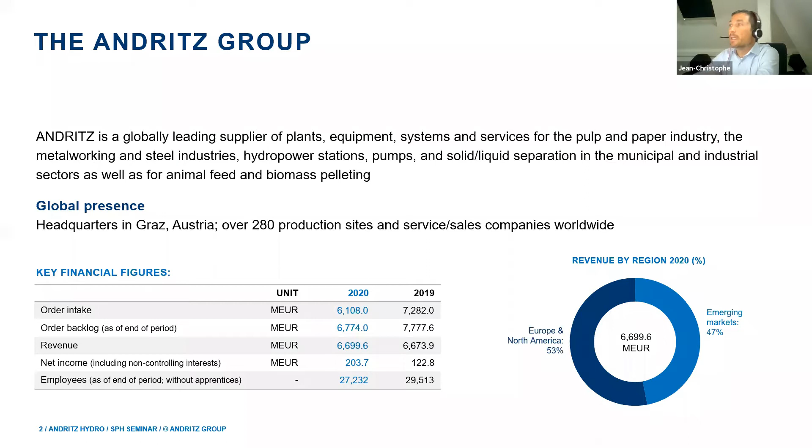Our activity weighs basically 6 billion euros per year, approximately. We have a global presence all around the world. And we are organized with 4 main divisions.

The biggest and historical one in the group is the pulp and paper division, providing equipment for the transformation of wood to paper, so the pulp and then the paper. We provide turnkey paper mills all around the world. Another division is the metals division, whose activity is mainly composed of equipment for metal forming and especially for automotive industries. I belong to the hydro division, so we provide electromechanical equipment for hydropower generation, which is composed of turbines and hydro generators, among other products.

And the last division is separation. We provide equipment for solid liquid separation, dewatering, applications in wastewater treatments for municipalities, but also for various industries, including mining.

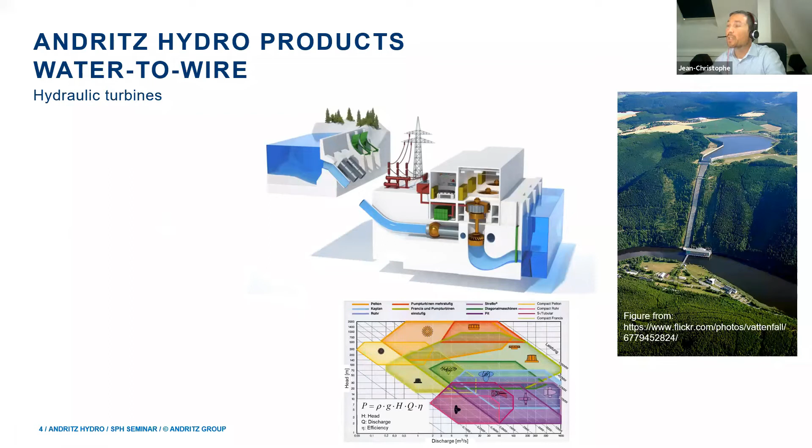And depending on this ratio between head and flow rate, we have all those various types of turbines, and we will focus more on this type of machine, the Pelton turbines, which are designed, or let's say specialized, for high head above a few hundred meters and relatively low water flows. It's an old lady which was invented in the 19th century in California during the gold rush.

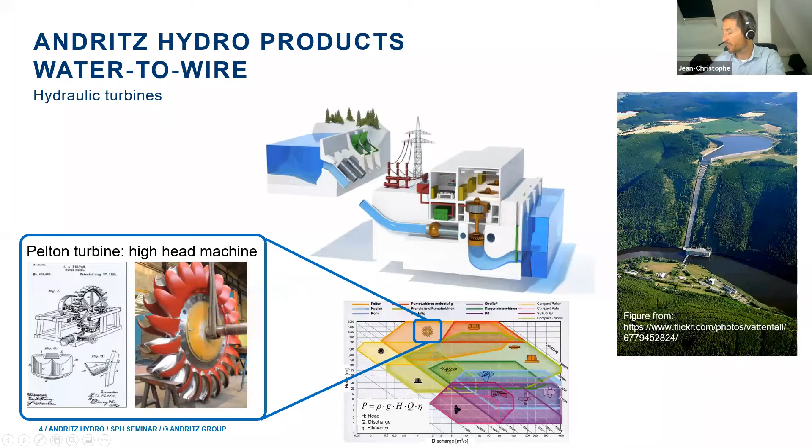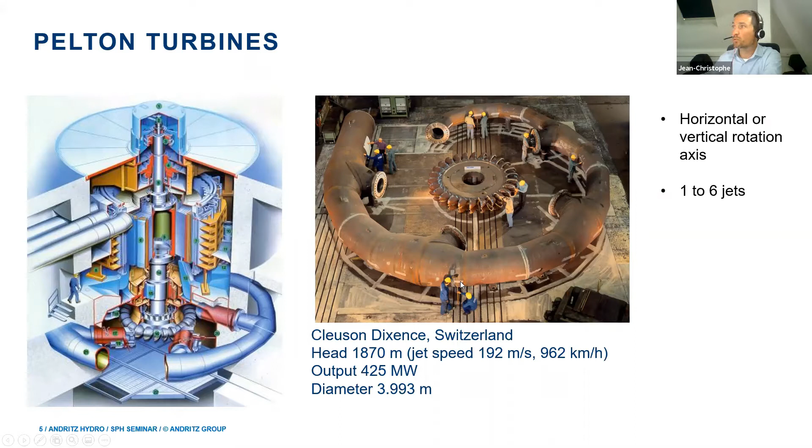When we look at the challenges for investigating the flow in these machines, we have to deal with quite complex physics. We have a combination of internal and free surface flows—internal in the Pelton distributor and all those pipings upstream. Then, of course, we have the jets and the runner; these are free surface flows. We have a rather complex geometry with rotating and static components. It's highly dynamic and unsteady.

We also have very different time and length scales. Let's assume the pipes have diameters of a few meters. The runner you have seen is also a few meters in diameter, but the buckets themselves are much smaller. Then in the jets we have surface perturbations with droplets, so it goes down to centimeters and millimeters.

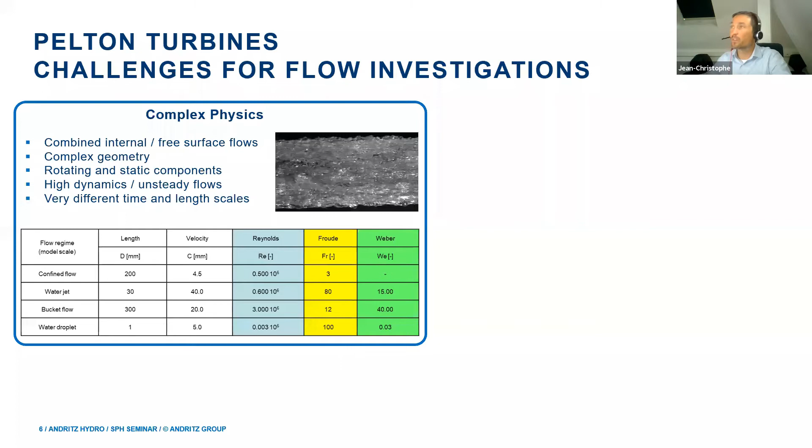So it's hard to respect all the homologies, especially when we look at model testing in laboratories. We are equipped with our own hydraulic laboratory where we test small scale machines. This is the historical way to develop hydraulic turbines, and it brought a lot of improvements in the past century, but it's also quite limited. It's of course very close to reality, but we have to sacrifice some of the homologies. It's quite expensive and slow in terms of development cycle time, and it only provides global information because the free surface hides basically what happens on the rotating buckets.

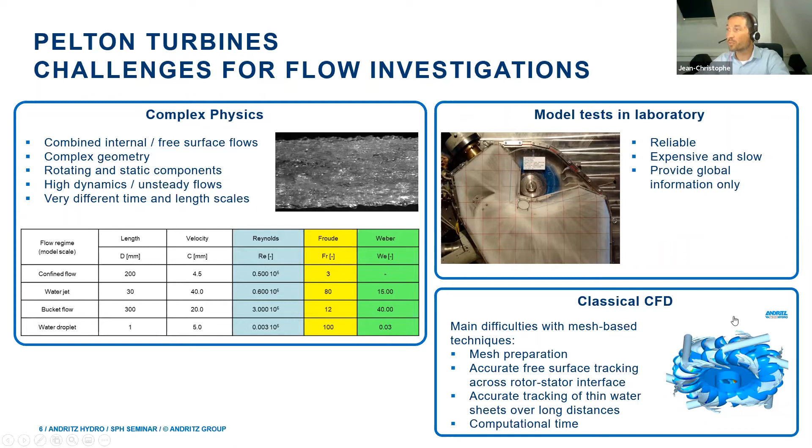In the 90s, the industry started to use classical CFD approaches using computational meshes to investigate what happens. This requires a tool able to represent a free surface with a mesh-based technique. The free surface, generated in a non-rotating simulation domain, has to cross a rotor-stator mesh interface once at the entrance of the runner, and a second time when the water exits and travels into the Pelton casing, the turbine casing. This is quite difficult—the mesh preparation is very tricky, the solver time is expensive, and a lot of expertise is required to set up such simulations.

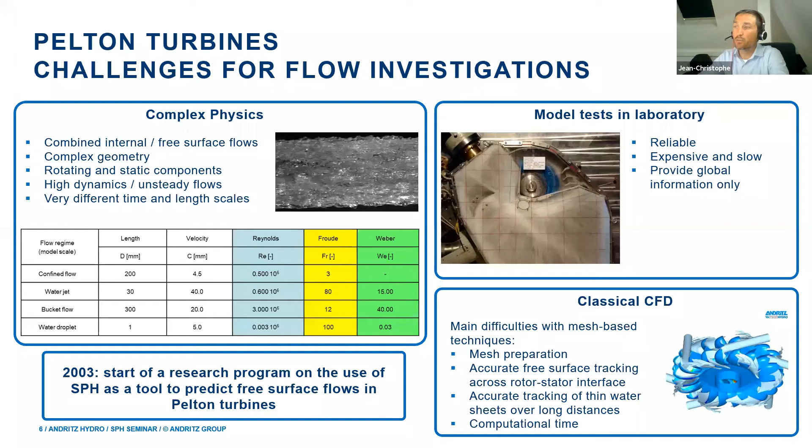That's why at the beginning of 2003, the company started a research program aiming at making use of SPH-like tools to predict the free surface flows in Pelton turbines. So that's a bit of the background and introduction to today's talk.

Now looking more precisely at the next steps, I will present what we have finally adopted as a numerical method to reach our target, the SPH Arbitrary Lagrange Eulerian approach. I will give some details of what we manipulate, present a few corrections we have added to this method that we use to reach good accuracy and precision in our simulations, some extensions that also pave the road for other applications, and finally some industrial applications for our hydraulic turbines, not only Pelton turbines. In my conclusions, I will also mention my opinion about the most demanding aspects of the method and where future investigations should focus.

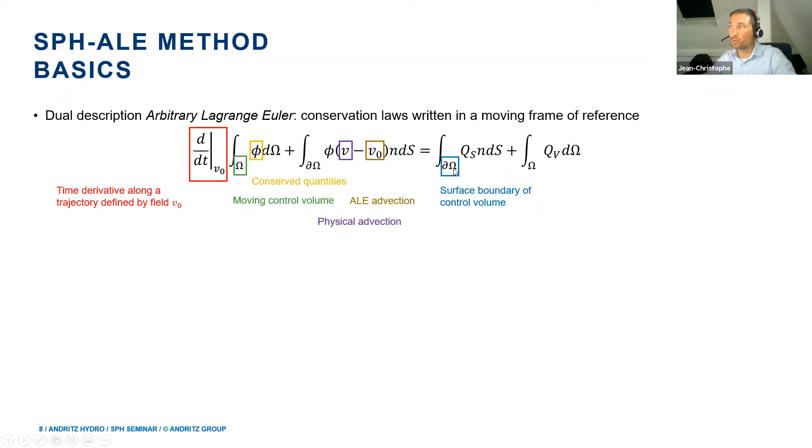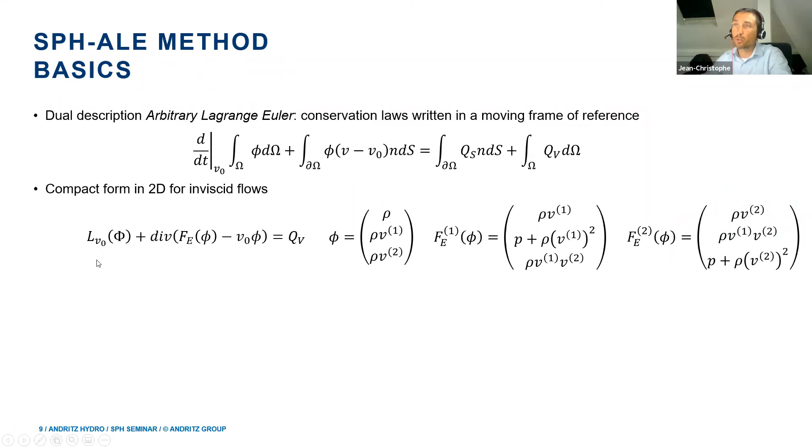Then we have the source terms, surface and volume terms, and this notation here will be related to the surface of the control volume, the surface boundary of the control volume. This being said, we can have a more compact form, introducing a transport operator here, LV0, which is defined by the transport velocity field V0.

Then by rearranging those integrals, we have the divergence of the physical flux and an ALE flux. Okay, and if we apply that to 2D inviscid flows, the vector of conserved quantities is densities and the two momentum components. We have a physical flux function, which has two components also here, and that depends on velocity and density and pressure. It's not written, but I will consider that we compute the pressure with an equation of state like the Tait equation, so a barotropic equation of state.

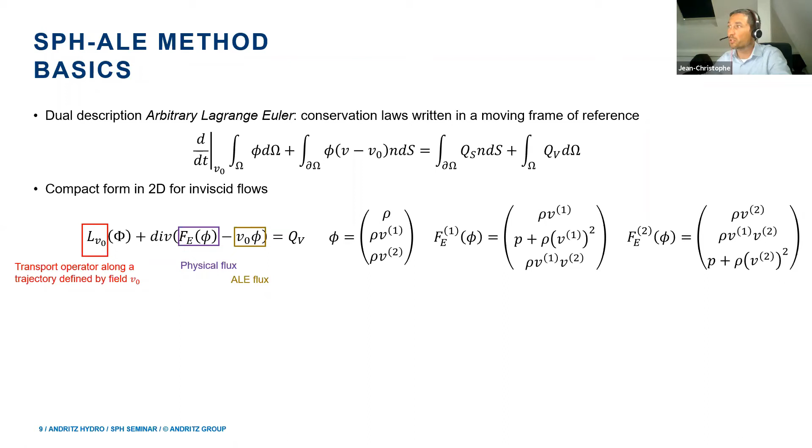Now we jump to the discrete version. So thanks to Vila, we have an SPH-based discretization of this compact form that has this form. It's the time derivative of the conserved quantities where the volume of the particle appears and the numerical fluxes, which are summed over the neighborhood.

So in terms of notations, I will usually designate the particle of interest I, while J is related to the neighboring particles. And the neighboring particles are contained in a certain domain, noted di, which is the support of the kernel function centered on particle I.

Here we have a numerical flux, which is adapted to a moving Riemann problem between the two particles I and J. And that one is used to assemble the ordinary differential equation.

So a few comments about this numerical flux. Let's take a very simplified neighborhood around particle I. Let's consider one of its neighbors with index J, and imagine that we have a sort of interface located between particle I and J, at the middle point between the two particle centers. So position denoted xij, and the direction linking the two particle centers is noted nij.

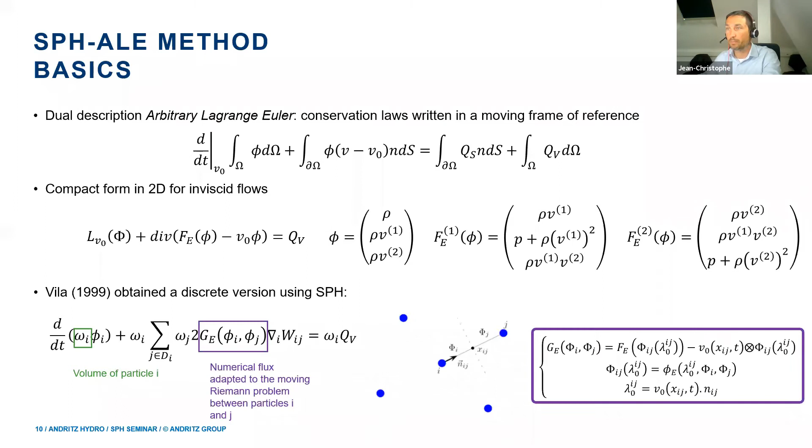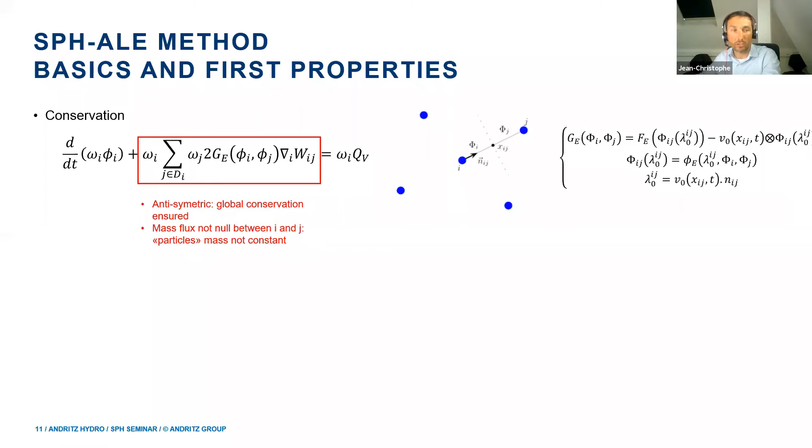So some first properties: we have global conservation because this flux summation involves terms which are antisymmetric. What is given from I to J is indeed received by J, let's say it simply like that. But what it also shows is that there is a flux of mass between particles I and J. There is no reason to assume that this flux will be zero, which means that the mass of each particle will change during the simulation, which is a difference compared to the classical SPH approach.

Of course, we need to add two equations to close the system, I would say. First is the motion of the particle centers, so obviously in our case we move them according to the introduced transport velocity field. And we have an additional equation compared to classical SPH, which is an explicit time evolution equation for the volumes of each particle.

It depends on the divergence of the transport velocity field, so the natural formulation is like that. It's equivalent to this one, where we introduce the interface velocity. We have seen that the physical fluxes involve this interface velocity, and it's quite convenient for the rest of the method to have directly this interface velocity in the volume equation.

This term involves symmetric contributions, which means the global volume is not conserved. That's a well-known feature in SPH. Here in SPH-ALE, it becomes visible, I would say, in this equation for the volumes of each particle.

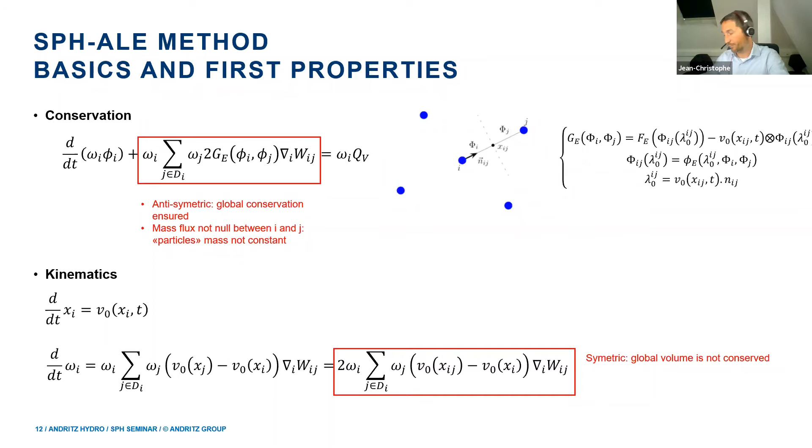Now, if we look at how we introduce boundary conditions in SPH-ALE, we do that by using what I would call a modified gradient or divergence operator for the particles whose kernel support intersects the boundaries. In fact, it's just going back to the way we usually move the gradient operator from the function to the kernel function by integrating by parts.

Usually this term, the boundary contribution, is neglected because most particles are far enough from the boundary. Since we usually have a compactly supported kernel function, this term is 0 for most particles in the domain. But for particles close enough to the wall, at a distance less than the size of their kernel support, there is a contribution that should not be neglected.

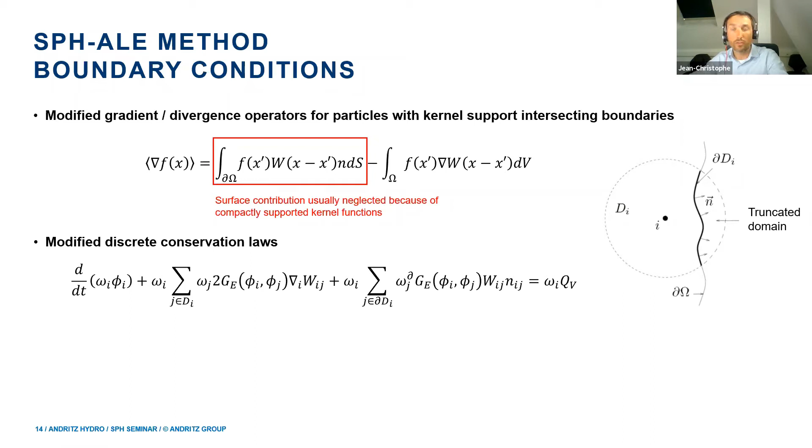The approach we have followed is to discretize that surface contribution in the gradient and divergence operators directly, by discretizing the boundary surface with calculation points and applying a similar quadrature formula to take into account the fluxes coming from the boundaries. When we do that, we end up with a modified discrete conservation law.

We again have the volume contributions that we had previously, where the summation is done over the neighbors which are volumic particles, and a second sum over the neighboring points which directly discretize the surface. These have a spatial extent, one dimension lower than the problem dimension. So in 3D they are surfaces, and in 2D they are segments.

We again have a numerical flux function adapted to a moving partial Riemann problem, because now instead of having two states, we have one state, which is the particle of interest, and the other state is in fact a boundary state. At the boundary, we impose some part at least of the solution. We will see that later.

Also in this summation, we no more have the kernel gradient. We have the kernel function and the normal vector at particle J, at surface element J.

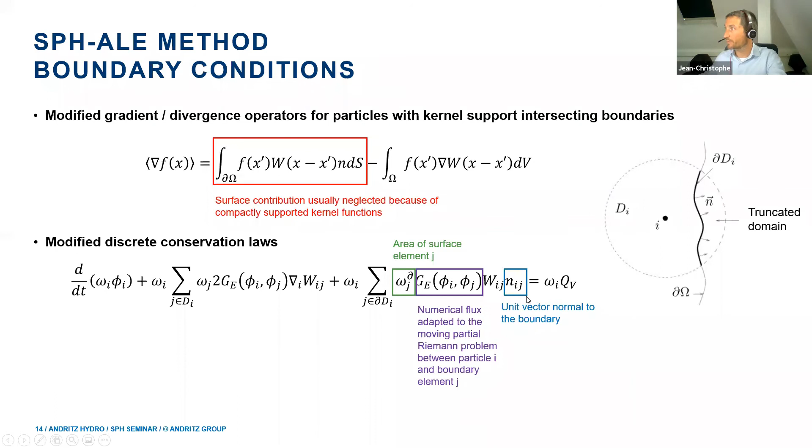Now in practice, how do we compute the intermediate state that is at the heart of the numerical fluxes? Well, we use Riemann solvers. The purpose of those solvers is to compute the solution of a discontinuous initial condition for hyperbolic problems.

If we restrict ourselves to the case of the Tait equation of state, we have only 4 states separated by 3 characteristic waves. So here we have a diagram with x, in a one-dimensional approach, x being the space dimension and t being the time. Initially at t equals 0, at x equals 0, we have a discontinuity. On the left, we have a certain state characterized by its own density and velocity. On the right, the same, its own density and velocities.

But then, right after t equals 0, we start to develop at the interface new states characterized by a constant density, which means a constant pressure also in our case, and a constant velocity in the direction of x. If we are in 2 dimensions, the second velocity component is discontinuous on both sides of this third characteristic wave that is in between the two others.

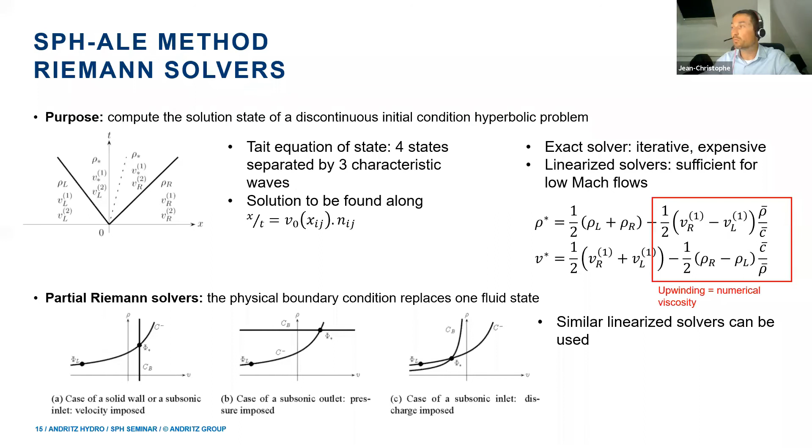A bit of improvement in the frame of low Mach number flows. Those Riemann solvers presented just before tend to introduce an excessive numerical viscosity. It's not only the case for low Mach number flows, also for medium Mach number flows it's observed. It's necessary to improve a little by adapting the left and right states that we inject to the Riemann solver.

To do that, a well-known technique, also derived from finite volumes, is called MUSCL, where the piecewise constant approximation, where we say the left and right state correspond to the states at the particle centers I and j, are replaced by linear extrapolations using a certain estimate for the field gradient on particle centers I and j.

So in practice, if we simply apply this extrapolation, we end up with left and right states composed of the states at particle centers I and j, and a certain extrapolation that depends on the gradient of the field estimated at particle I or particle j, and the vector joining particles I and j. If we just do that, the system tends to be unstable.

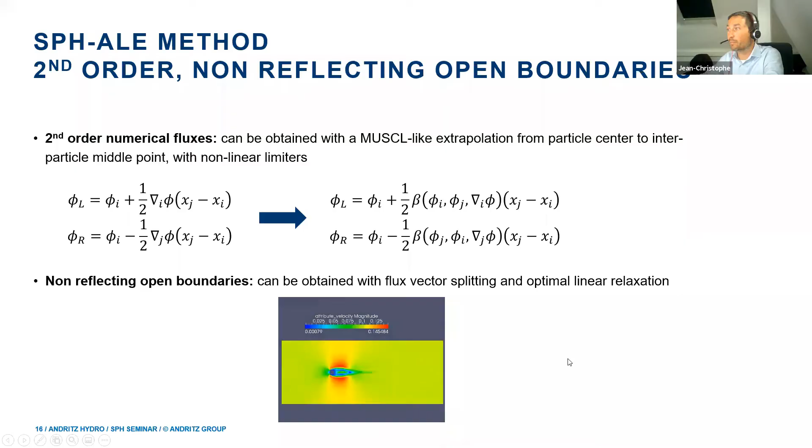Okay, now that we have the basics of SPH-ALE, we will have a look at some correction techniques that we have introduced. The first is balancing of the particle volumes.

As I said, we have an explicit time evolution equation for the particle volumes that is based on the divergence of the transport velocity field. Let's assume that we choose this transport velocity field as being the physical velocity field, the Lagrangian field.

We can have strong changes, I would say, from one particle volume to the next one, because the regularity of the transport field plus the inaccuracies of the SPH divergence operator can lead to that. But we also know that SPH is not very good at handling particles which have different sizes.

So our target here is to try to maintain a rather homogeneous map or field of particle volumes. And to achieve that, a certain diffusion term in the equation of the volumes is desirable.

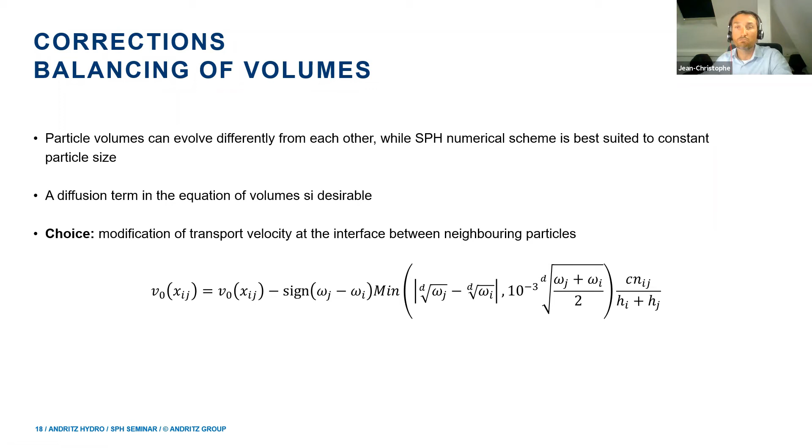Another correction is about, again, a modification of the Riemann solvers. As I said, even if we have a MUSCL scheme, if we really have low Mach number flows, we suffer from too high numerical diffusion, numerical viscosity. It's well known also in the finite volumes community, and a well-known solution on their side is to use preconditioning.

So us, we have a sort of transient solver, and we don't want to compute a converged steady state. We have to compute a succession of transient states, so the preconditioning can only be applied to the upwinded part of the Riemann solution. In practice, it consists in multiplying the Riemann problem with a preconditioning matrix which scales with the square of the Mach number.

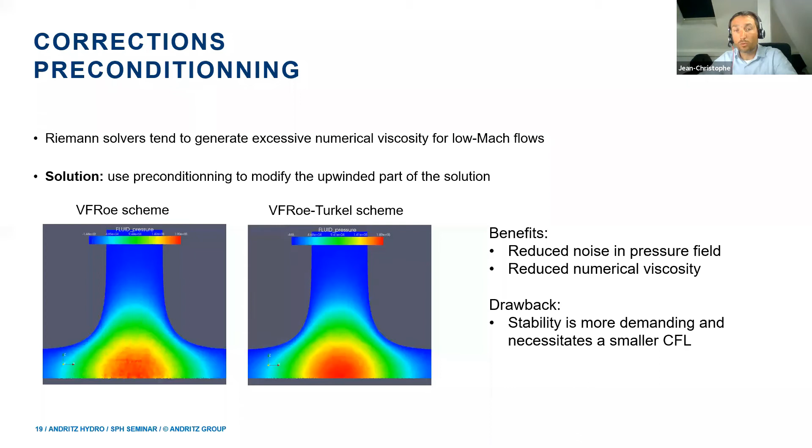So we increase a lot the number of iterations of the solver to reach a certain physical time, and this is a bit tricky. So in practice for industrial applications, it's not always possible to pay that additional price. A more important issue is about how we do the flux summation in SPH, because SPH-ALE relies on a flux summation that is governed by SPH divergence operator. And we focus on what we in ANDRITZ call the closed box error and closed box correction.

To introduce the topic, I make a parallel between finite volumes, integration stencils, and what we have in SPH. On the left, I have a sort of unstructured finite volume mesh that would be the closest variant of finite volumes to our SPH, I would say. And we know that by construction, the finite volume mesh fulfills this condition. At the continuous level, we expect that the integration of this term, which is the unit vector pointing outward the finite volume cell along the cell boundaries, is equal to 0. And by construction, the finite volume mesh guarantees that very easily, because if we are in 2D with triangles, the triangles are real triangles.

Now, if we look at what we have in 2D in SPH, at the continuous level, the equivalent of this condition is supposedly fulfilled. But the discrete counterpart, which involves maybe only volumic contributions or a combination of volumic and surfacic contributions, if our particle of interest is close enough to the boundaries, is not equal to 0 exactly. That's what we call the not closed box, and this is a problem.

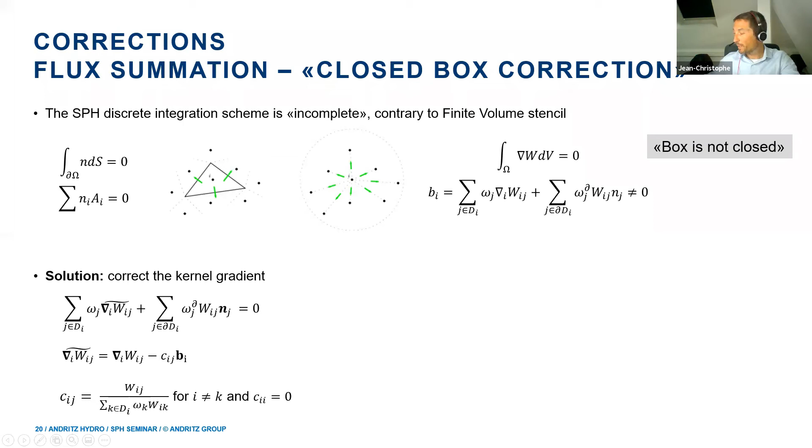As I said, the error is local and the correction is local also, which means that we break the symmetry of interactions between particles I and J, which means that we break the global conservation. It's often a debate in the community whether we should favor conservation or consistency. I tend to favor a little bit consistency in this situation, because the benefit that we get in practical applications surpasses the drawback of breaking the global conservation.

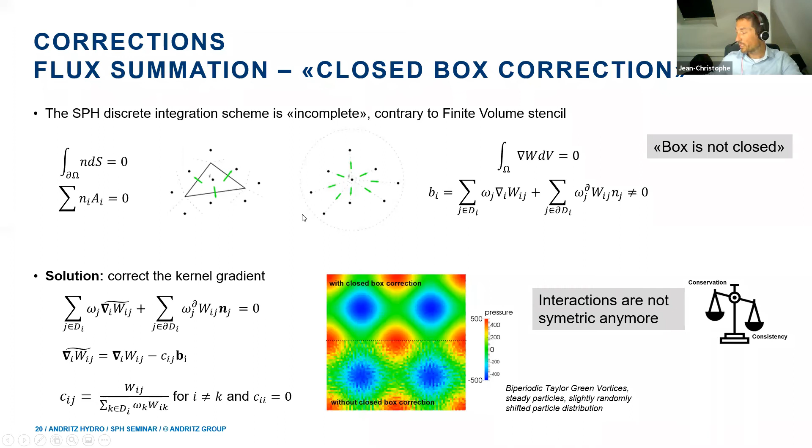This correction technique that we apply on the kernel gradient, so that we improve the flux summation scheme, is related to the next one, which is particle shifting. The previously introduced kernel correction cannot be used if the error monitored on a given particle becomes too large. I can't give a precise meaning of what too large means, but if we do nothing on the particle positions, we can't apply it for a very long time. So we have to maintain this error within a certain bound.

For that, we apply a particle shifting, which is highly inspired from the packing algorithm introduced in the community by our Italian colleagues. We apply that particle shifting at each iteration by modifying the transport velocity of each particle. This is again very valid in our ALE approach to do that.

How long do I have still? Hi Jean-Christophe, you have between 5 to 10 minutes more. Okay, I will hurry up a little bit.

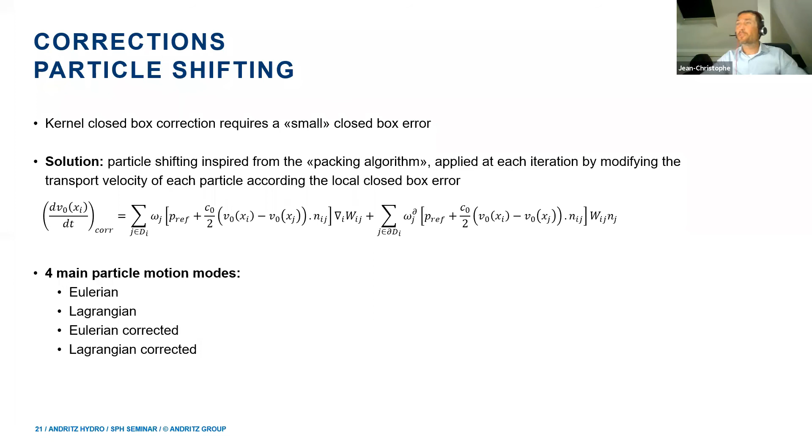So this is the form of the correction. We have a certain number of particle motion modes. I will focus on one, which is what we call the Eulerian corrected. Here you can see that the correction involves also a possible motion of the boundary elements.

Here is what we can see: we have moving NACA blades in 2 dimensions. Particles around those rearrange themselves according to this motion. The others remain steady, and we have no glitch at the interface between moving and steady particles, just a smooth transition.

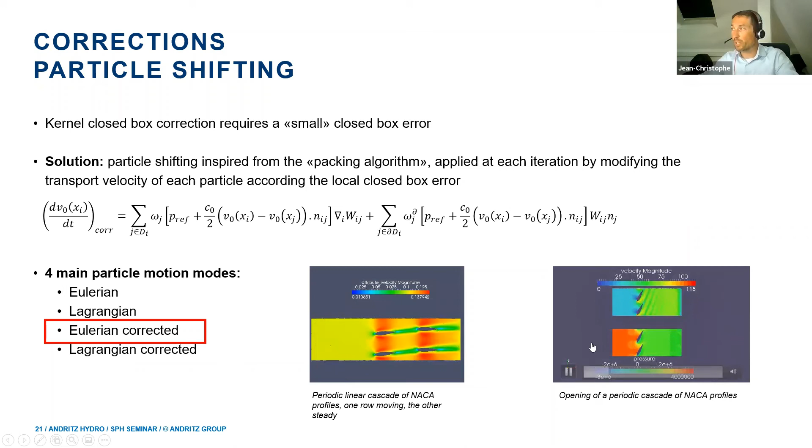And here the same with blades which have an open motion, so we establish a flow. It's the same: particles around the blades move, the others remain steady, and there is no average motion from inlet to outlet.

Some extensions: it's possible to have multiphase with SPH-ALE. For that, we block the convective fluxes between interacting particles. We also introduce acoustic Riemann solvers, which are able to derive a solution of the Riemann problem even with a strong ratio of acoustic impedance, meaning strong ratios of density mainly.

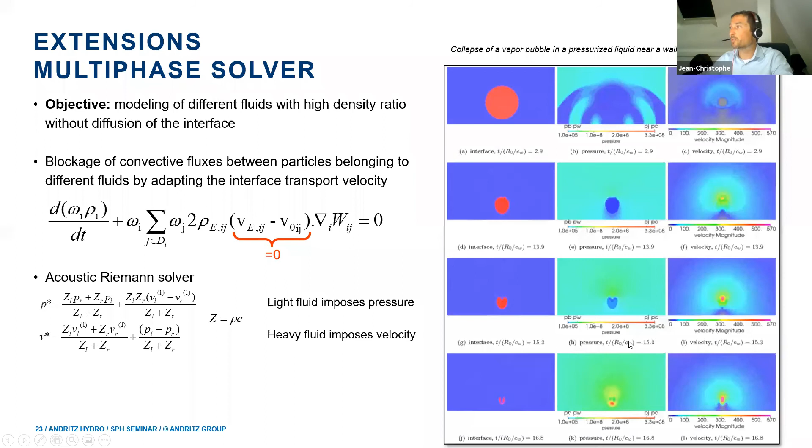As an example, here is the collapse of a vapor bubble immersed in a heavy liquid, which is pressurized and close to a wall. This is the result we have: a microjet forming inside the bubble during the collapse, and we can compute velocities and, more importantly, the pressure.

Another extension is the coupling of SPH with finite volumes. The strategy relies on overlapping SPH and finite volume domains, with the target of using each method where it's best suited, especially to have the neighborhood or skin around a certain body managed by finite volumes, so that we can have refinement in the normal direction to the wall.

We use chimera finite volume cells to transfer information from the SPH domain to the finite volume domain. The overlapped SPH particles can use finite volume cells as neighbors, or they can have their properties interpolated from the finite volume cells.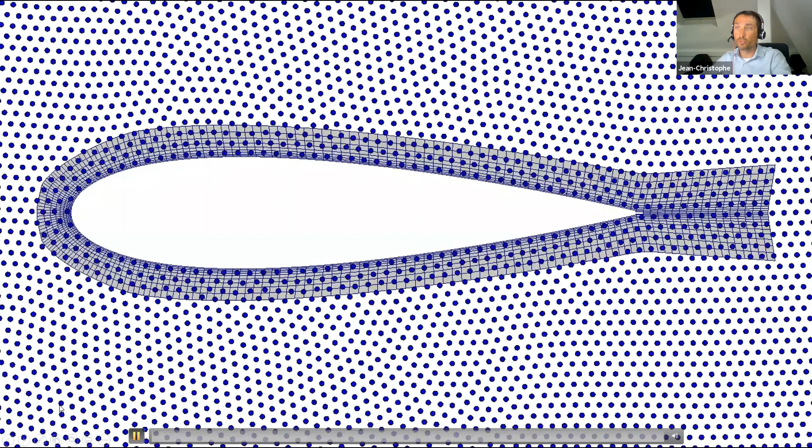It can also run with moving bodies. Here we have a rigid body motion for the finite volume domain, and the particles rearrange themselves as previously, using this Eulerian corrected motion mode. Here is an illustration of what it gives in terms of pressure predictions, with a clear motion of the stagnation point and the appearance of the detachment.

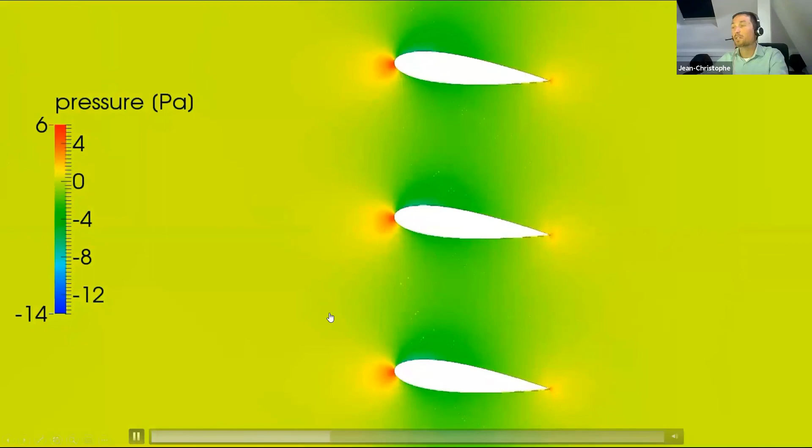Again, this coupling is not fully conservative, but consistency is for us more important.

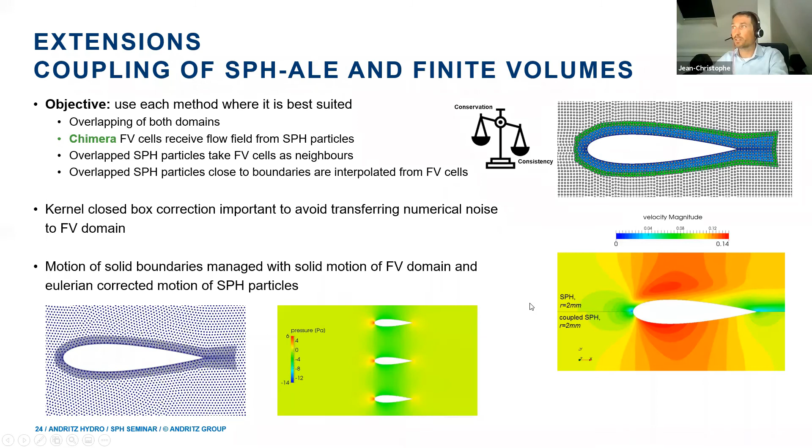Another extension is with higher order schemes. Here the goal is to make sure that our overall SPH-ALE scheme is guaranteed to provide a certain convergence order, convergence rate everywhere in the domain. Necessary is to have higher order numerical fluxes and flux summation operator. To do that, we used moving least squares: for the numerical fluxes, we replaced the MUSCL reconstruction with MLS reconstruction.

And for the divergence operator, we replaced the SPH operator with MLS shape functions. This, by the way, naturally solved the closed box error issue.

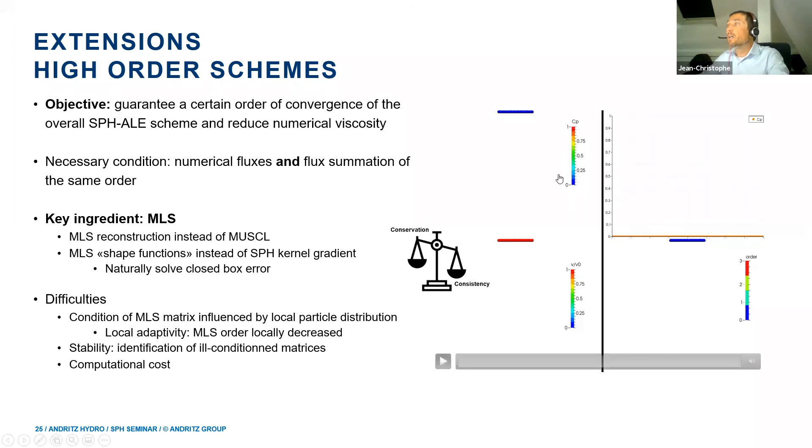Some results here: it's again the case of a 2D jet impacting a flat plate. Here is the pressure coefficient in the domain, here the pressure coefficient on the plate, and here is the order that we reach with MLS in the domain. Red is third order, so it's the target.

We have to degrade internally because of some ill-conditioning of the MLS matrix in this region shown in green, where we only have second order. Also close to the free surface, where we have to degrade to zeroth order, and close to the wall also we have to degrade. That's the difficulty of this approach.

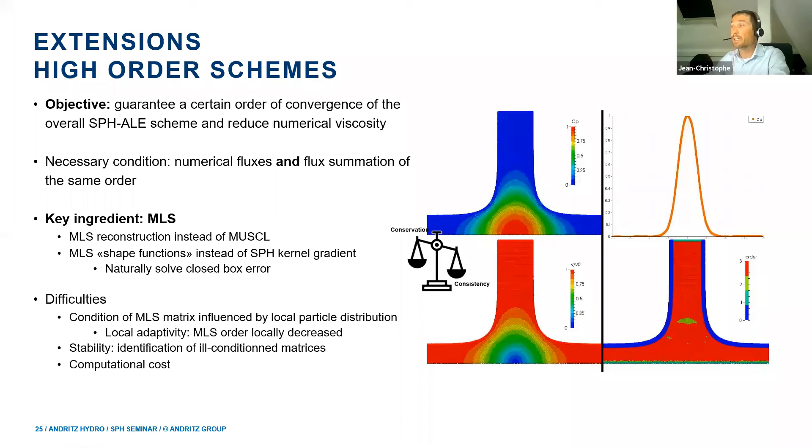The condition of the MLS matrix is very delicate, and to maintain stability, we have to degrade the order of the MLS reconstructions. Again, we have to sacrifice global conservation for the benefit of higher consistency.

Going to the applications. Our daily business in Pelton design makes use of this process. Based on an SPH-ALE simulation of the flow in rotating buckets, we characterize the hydraulic performance of the Pelton buckets, and we also extract the pressure loads on the rotating buckets, injecting that into a finite element solver to compute the stresses. This is really done on a daily basis in our company.

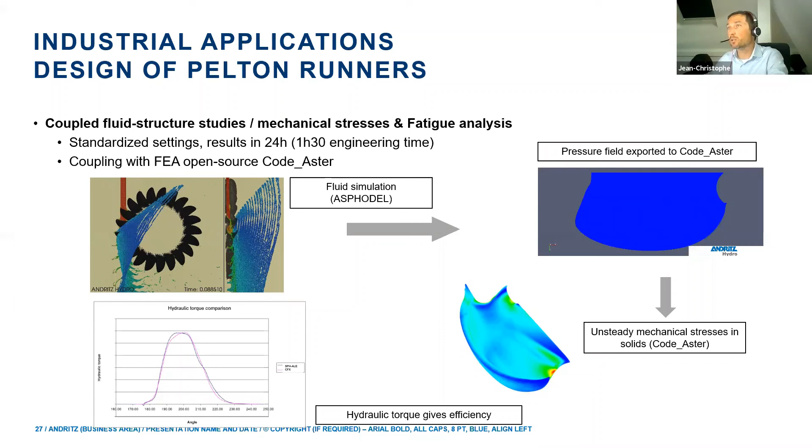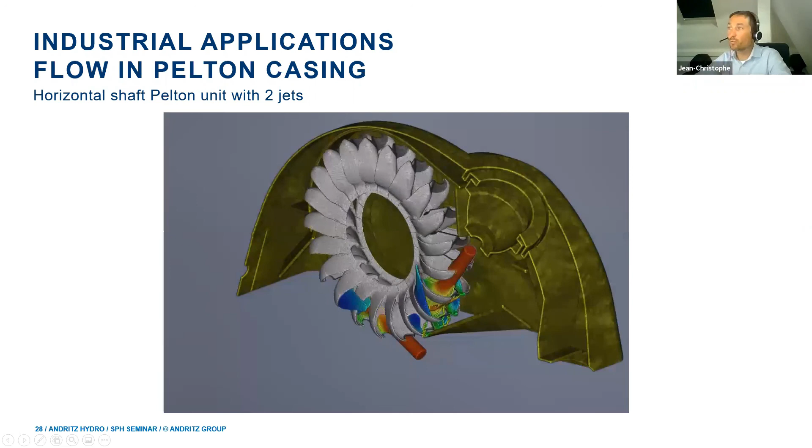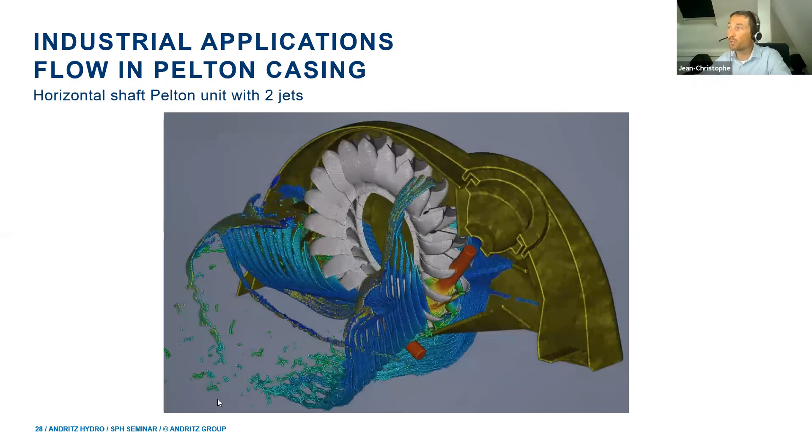More interesting: we are now able to simulate casing flows. Here is the example of a horizontal axis Pelton turbine in its casing with two jets. The particles are colored by their velocity in the absolute frame of reference, so red is high velocity and blue is low velocity. What's of interest here is that we managed to track those water sheets over a long distance until they impact the casing walls, which is very important for the design.

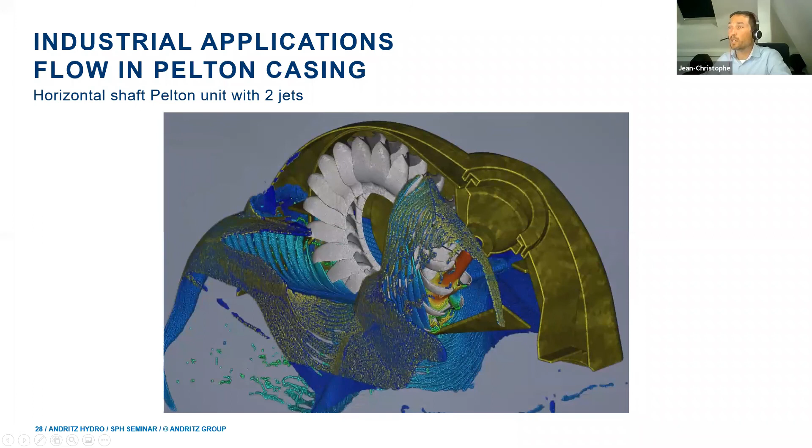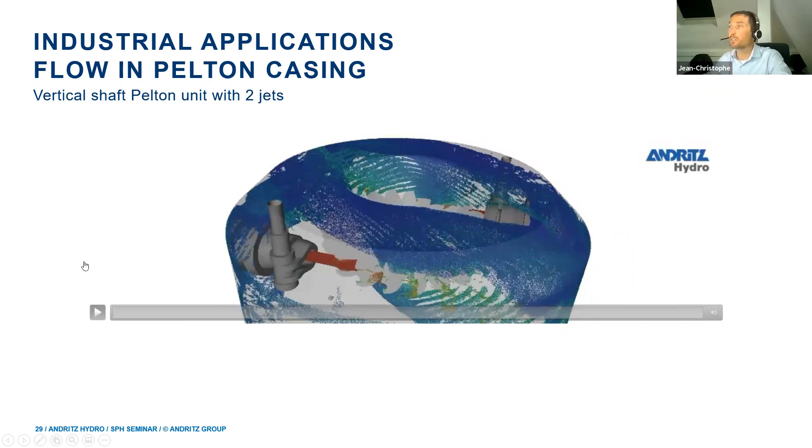Here is an example which involves dynamic behavior: the startup of a Pelton turbine. We start with a Pelton runner initially at rest, representing only half of the runner. We have a water jet that is gradually increased in diameter to mimic the gradual opening of the injectors. The rotation speed of the runner is computed by the solver according to the driving hydraulic torque and an analytical model representing resistive torque from friction and possibly electrical torque on the machine. Here we monitor the runner speed and the discharge, both increasing step by step.

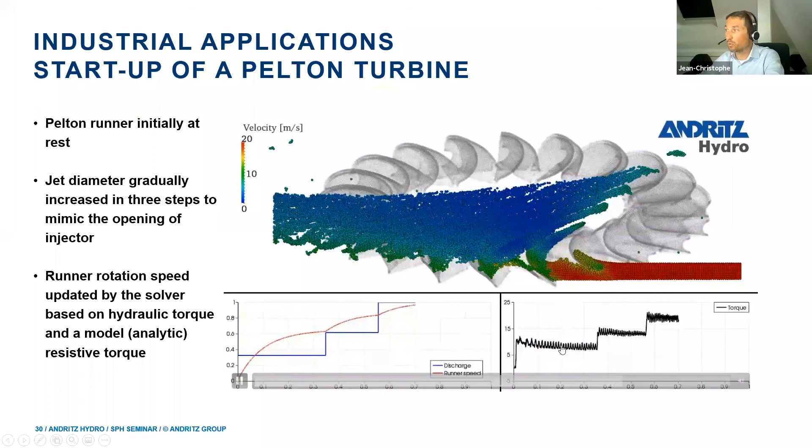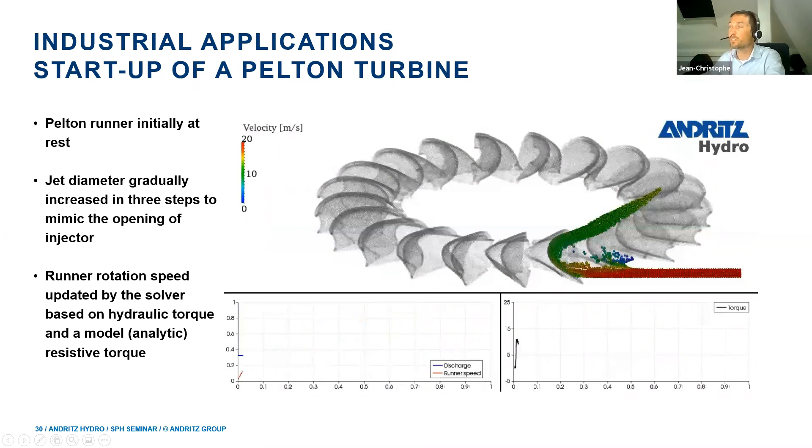Here is the torque, where we can see the interactions between buckets and jet as spikes, which become more and more frequent, a sign that the runner is accelerating. Based on that, it was possible to compute the stresses in the buckets, since startup is a very demanding phase. Here's another example.

The target was to provide a virtual test bench for a regulation algorithm aiming at finding a stable position for this device, a deflector, in case the runner is suddenly disconnected from the grid. Usually this leads to runaway speed, which is why there's a protection to immediately deviate the jet. But the target here was to maintain the runner rotation speed at synchronized speed, because the customer was interested in restarting power production as soon as the grid becomes available again.

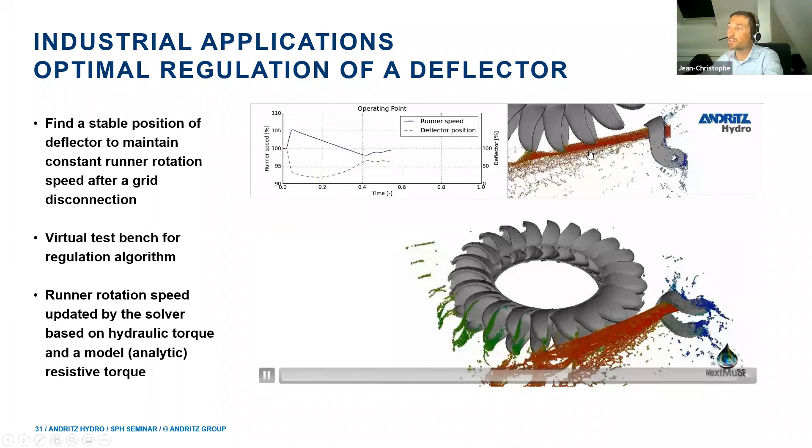The runner rotation is again a balance between the small torque obtained from the deviated jet and a certain resistive torque. We can see that finally the regulation algorithm managed to find a stable position for the deflector, and we maintain the runner rotation speed at nominal speed.

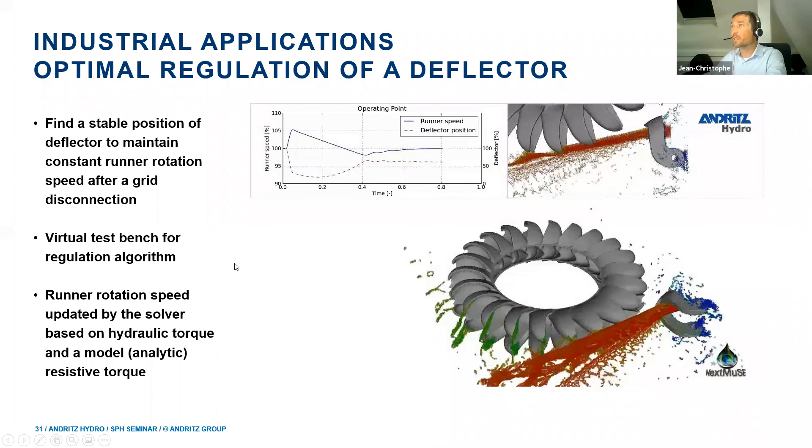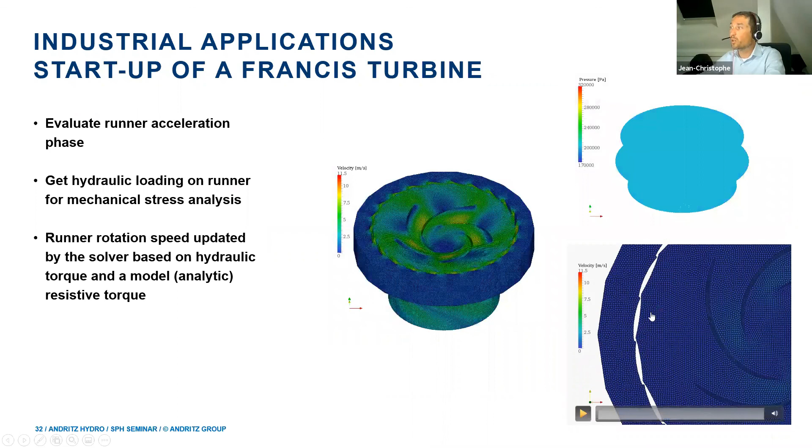An example with confined flows: the startup of a Francis turbine. Here is the velocity in the domain, here is the pressure on the runner, and here is a zoom on the particles around the guide vanes. We have a circle of guide vanes which is originally closed, and we impose a total pressure at the inlet around the domain, and at the outlet we impose an outlet pressure. When we open the guide vanes, the flow starts, and the runner again starts to rotate because the solver solves its equation of motion.

Again, the target for us was to get the hydraulic loads on the runner, because the startup is very demanding. So here you see an example of application for confined flows, where SPH is interesting because it can very easily manage the deforming computational domain around the guide vanes.

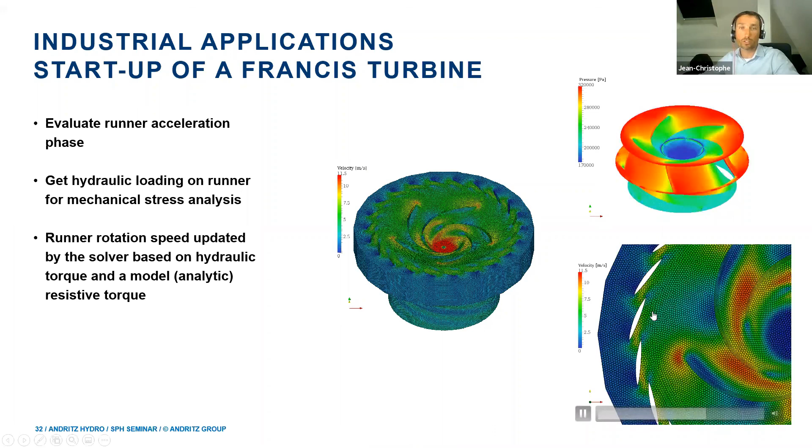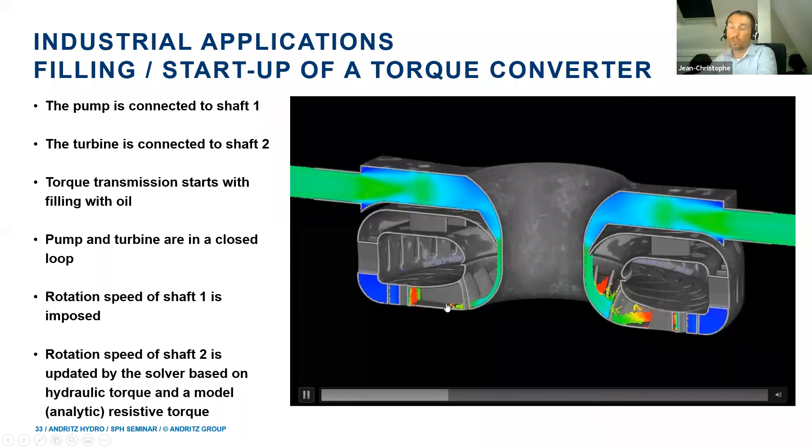We inject oil, a liquid, from those two inlets. We fill the upper chamber, and when it's full and pressure is established, we start to really push the liquid into the pump, and the pump provides energy to this liquid. For the moment it's a kind of free surface flow in the pump, and the liquid goes across the turbine, and you see the turbine starts to rotate, but we also start to fill the closed loop here.

But for the moment, we still have a free surface flow in the pump, and most probably also in most of the turbine. But it starts to be filled with liquid.

Very soon we will start to fill completely the closed loop, and instead of having a free surface flow, we will have a confined flow in the pump and then in the turbine. Now we really start to transfer a lot of energy from the pump to the turbine, so the acceleration of the second shaft becomes very, very important.

At some point, everything is full of liquid, so the inlet sections do not deliver new liquid particles anymore. We have an established recirculation in a closed loop, and we go on accelerating the second shaft until we reach a synchronized speed. That's a hydraulic clutch.

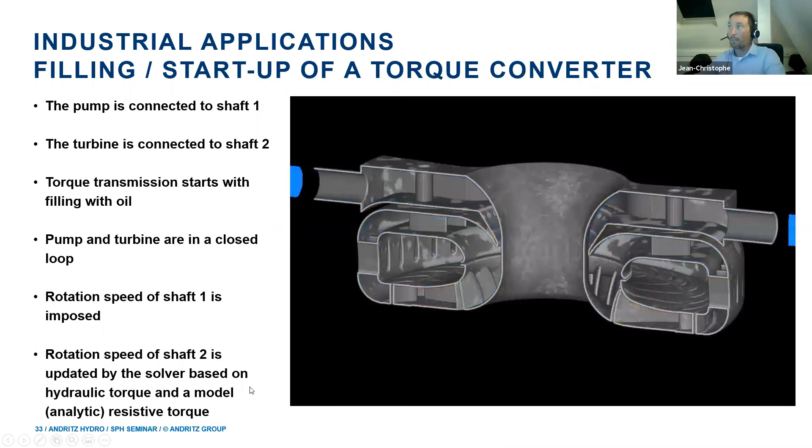Okay, quick conclusion, it's only one slide. Sorry, Angelo.

As a conclusion from our point of view, with SPH-ALE we have a very stable and versatile tool for various applications in hydraulic turbines, and not only for free surface flows. You have seen examples of applications in confined flows, especially with deforming simulation domains. But SPH-ALE also provides clear evidence of the main problems, I would say, of SPH.

For me, if we look at Eulerian simulations, which are very easy to perform with the ALE formulation, we have results competing quite well with finite volume results. I don't mean competing in terms of computational time, but in terms of quality of the results—they are kind of similar.

But all the problems we have really start when we start moving the particles, especially with a Lagrangian particle motion, because then the particle distribution becomes disordered. We have little control on what happens, and at minimum we have to impose this correction of closed box error if we can.

For us, the combination of SPH with other methods, like finite volumes in our case, is really key, because SPH cannot be good at everything. It should be restricted to flow regions where it is the best choice. Otherwise, it should work in combination with other techniques elsewhere in the domain.